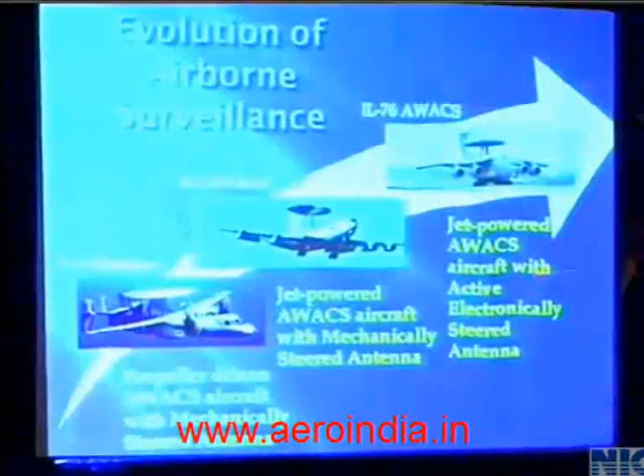The real AEW&C program, the first operationally feasible one, started with the E-2 Hawkeye, as everyone knows. That was followed by the E-3 AWACS of the Americans. Both employed a mechanically rotating antenna, primary radar, and IFF back to back. Very soon we saw the advent of the active electronically scanned array, AESA, and the Indian Air Force has already inducted the IL-76 from ELTA. The arrival of AESA radars, which basically consist of...

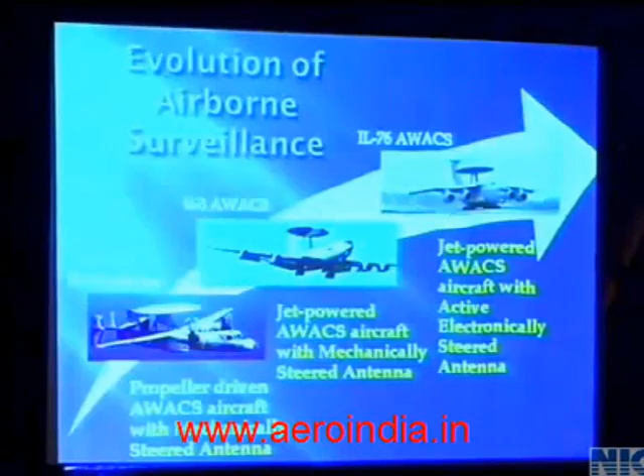each element of the array fed by its own transmitter and receiver and a common phase shifter, lends itself to a few operational as well as technical advantages. I'm sure that an august gathering like this is quite aware of the capabilities of AESA radar.

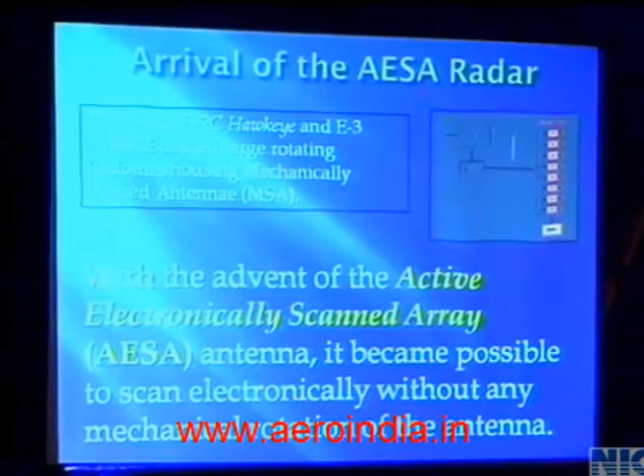It could provide graceful degradation in performance. It could give a very electronically agile beam, which permits you not only to do track-while-scan but also go in for high precision tracking, full track mode, with updates of measurements from the radar at your disposal. It has better ECCM features, so I'll not go into all those. This brought about a kind of change in the scene of AEW and AWACS the world over.

These are the currently AESA-based five systems. We'll have a quick look at each one of them.

The first one in the AEW or AWACS scene was the Swedish Erieye radar on the Saab 340. It employed two arrays in a rectangular pod-like structure on top of the aircraft. It was propeller-driven, an S-band radar giving 120 degrees on either side, that is 240 degrees total, so there was considerable blockage in the fore and aft axis of the aircraft.

The second one, the same Erieye, was adopted by the Embraer platform, and this particular system is available with Brazil, Greece, and Mexico.

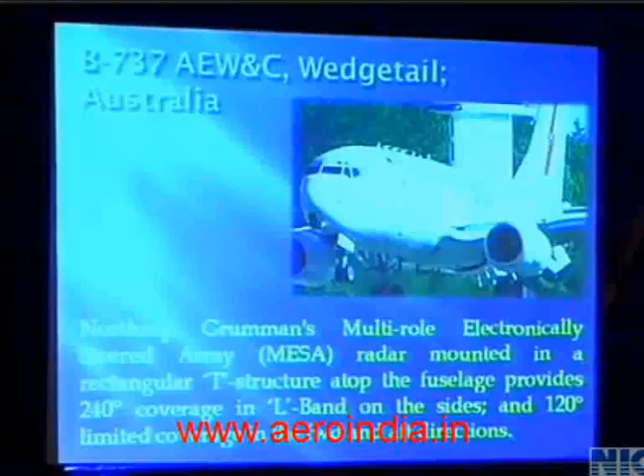The other one, Wedgetail, is Boeing's offering to the Australian Air Force and Royal Air Force. It employs the MESA radar of Northrop Grumman, with a T-structure dorsal unit on top.

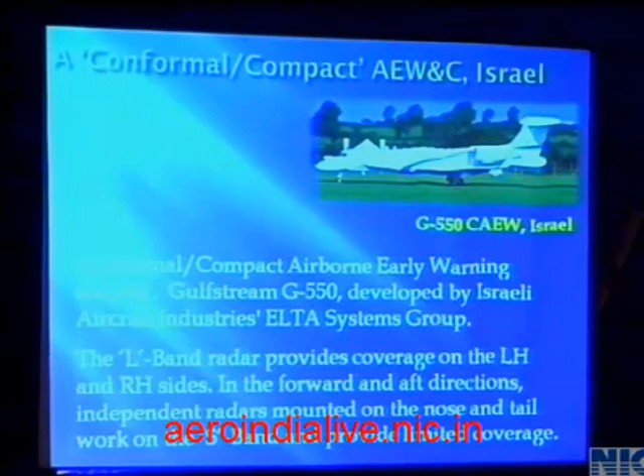The side panels in L-band provide 240-degree coverage, and the top hat provides the fore and aft coverage. Of course, ELTA is here, maybe he will talk more about it. The lack of coverage in the fore and aft axis is covered by S-band arrays in the front and back of the radar on a G550 platform, and our own Indian Air Force AWACS, which covers 360 degrees.

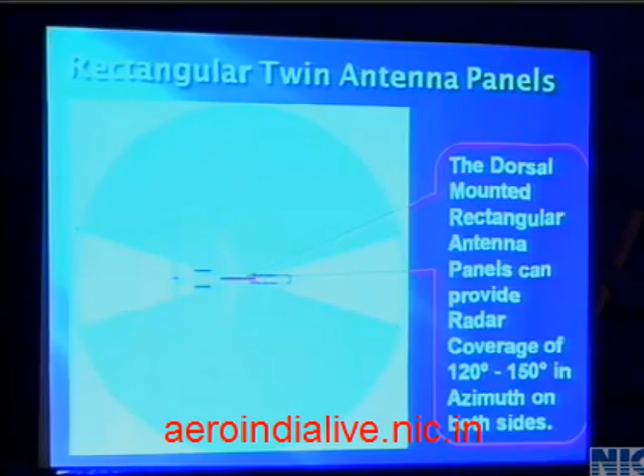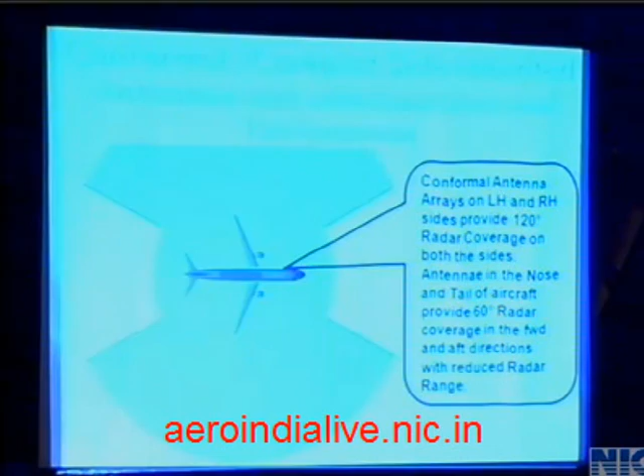Just to bring home the point to those who may not be aware, a 240-degree coverage looks like what is depicted here in blue. When you go for a limited aperture for the fore and aft, you end up with coverage less than what is on either side. The percentage could range, it's anybody's guess. However, if you use 3 panels, each covering 120 degrees, and put them in a dome, this gives you equal coverage all through the 360 degrees.

Incidentally, keeping in with the theme of this seminar, even here, India, Israel, and Russia were in collaboration and networking to produce this product. Now, with this introduction, I come down to our own system.

The operational roles that the Air Force envisaged for this system were to detect, track, and do the command and control function, and act as a complement to the bigger IL-based system.

AEW is not new to CABS. Way back in the 90s, we had mounted a mechanically rotating rotodome-based radar on top of the Avro HS748. And many of you who are old-timers would know that it came to an unfortunate end.

From there, keeping in with the trend of the world, we have also switched over to the electronically scanned AEW&C based on the Embraer 145, using a rectangular panel on top in S-band.

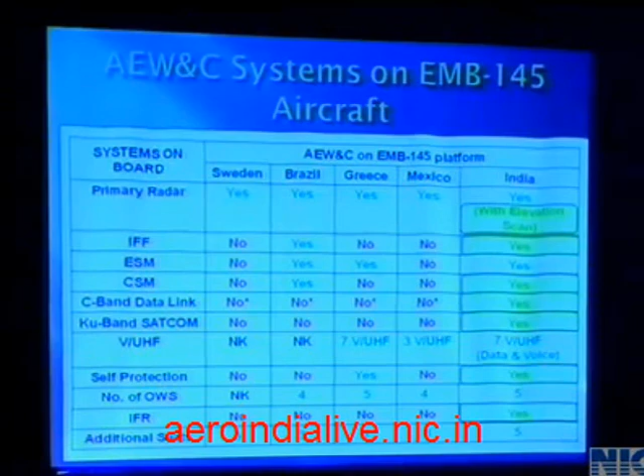So these are the major differences I would like to keep in mind, and the capabilities we intend to put in place, and so far, how far we have come in implementing this. Let's have a look at that.

Who are our partners? The Active Array Antenna Unit, AAAU, what we call the dorsal one, is designed and developed by CABS, Centre for Airborne Systems. We are the nodal agency for this program. The rest of the subsystems of the primary radar come from LRDE Bangalore, that is Electronics and Radar Development Establishment. IFF is done by CABS, and ESM is from DARE, Defense Avionics Research Establishment, Bangalore. Communication support measure comes from Defense Electronics and Research Laboratory, Hyderabad. So these form the 4 major sensors of the AEW&C system of India.

This is the mission system controller, in other words the mission computer, which is the heart and nerve center for the computing. It carries out the integration of all the sensor data, establishes system-wide tracks, carries out threat assessment, provides control and guidance, intercept vectoring and recovery, and a host of housekeeping duties.

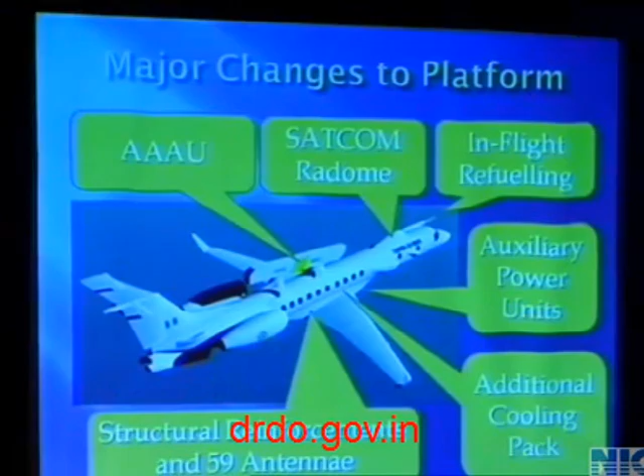Similarly, the in-flight refueling, the IF refueler, happens to be the IL-78 based one. It's a 4-engined aircraft. This aircraft needs to go behind it in its huge wake and mate successfully and get refueled. So these are the major modifications which have been done, and various working groups working on this have interacted both technically and managerially to get this going.

Similarly, a view of the cabin layout. We have the mission system racks in the front - this is the fore and this is the aft of the aircraft. These are the mission system racks, followed by 5 operator workstations, rest crew seats. Then we have some storage facility, and we have added auxiliary fuselage fuel tanks to increase the endurance of the aircraft. This calls for working in close relation with Embraer for weight and balance, CG balancing of these.

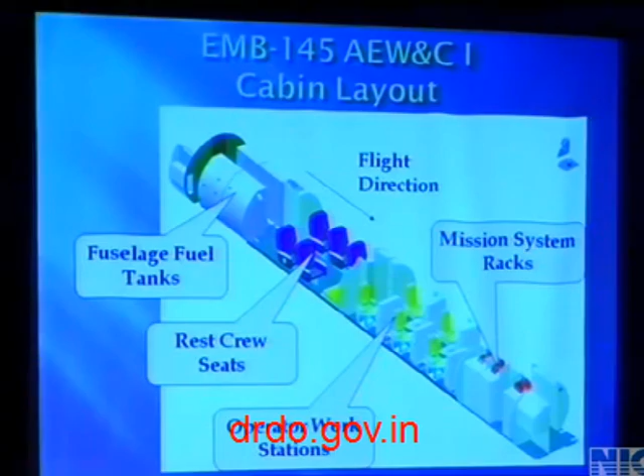Although Embraer was to certify against FAR requirements and look after the handling capabilities of this air platform, we, as the designer of AAAU, were to have inputs on the aerodynamic as well as inertial loads coming onto the dorsal unit at different alpha and beta angles.

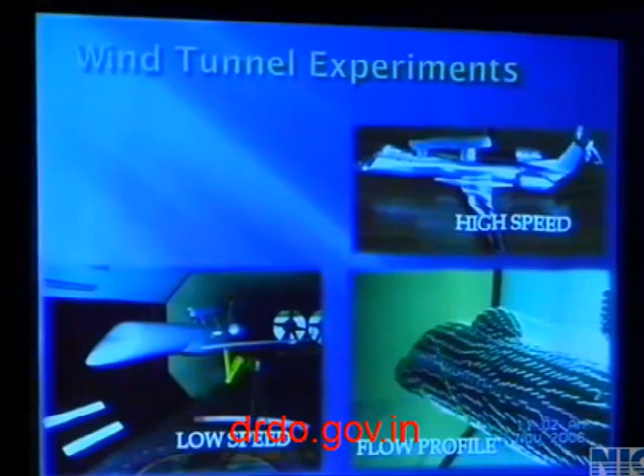So we ran our own wind tunnel campaign, both at low speed and high speed, at the Indian Institute of Science Bangalore and NAL Bangalore, including flow visualization, to arrive at the load, and that formed the basis on which we worked our structural aspects of the AAAU. So IISc as well as NAL were leveraged for the wind tunnel as well as the stress analysis, CFD studies.

You can see the airflow depiction of the TR modules, the RAM air being taken and circulated to cool the electronics within the AAAU.

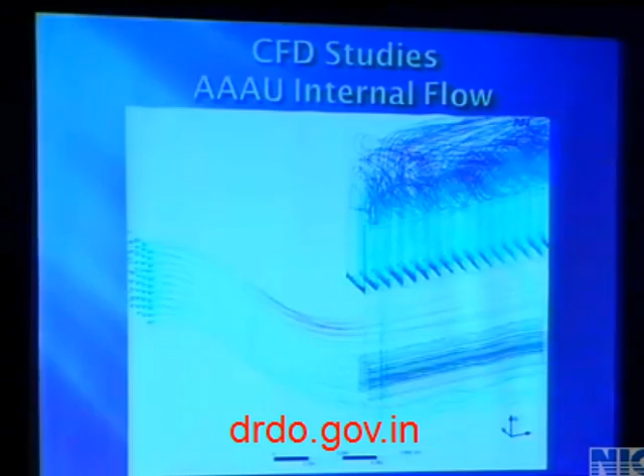Now I'm halfway through my talk, so far maintaining the timing. The prima donna of AEW happens to be the primary radar, and most of my time will be on this, because the platform aspects you have already seen.

Making of the AAAU was not a simple thing. It is multidisciplinary in nature, starting with aerodynamics, mechanical, environmental, electrical, material and fabrication, and of course the electronics. There was interaction amongst all these design groups to arrive at a viable AAAU which a 24-ton aircraft can take, while giving radar performance which matches or at least exceeds what is available contemporarily.

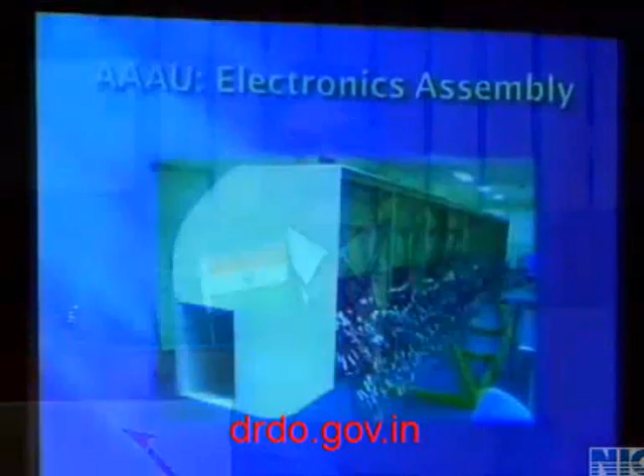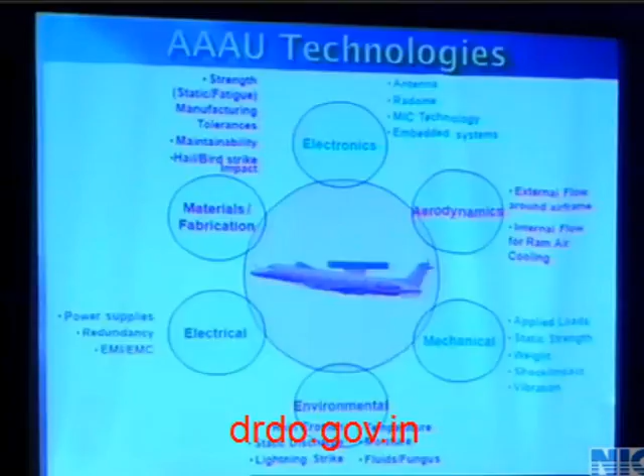Probably we can discuss this further for those interested, but that particular slide depicted the kind of networking needed at CABS to achieve success in this field. This shows the miles of RF cables being routed from the TR modules to the radiating elements.

The AAAU itself consists of, this is the front of the AAAU. There are two ducts running through the entire length of the 8.24 meter long dorsal unit. One carries the RAM air, the other takes away the hot air. The primary radar and IFF radar panels you can see here.

This is the primary radar S-band array, and this is the L-band array of the IFF. You can see the 8 elements in elevation to provide elevation scanning. It is now mounted for one of the structural tests, which I will cover soon. This is the GVT and modal analysis that was carried out.

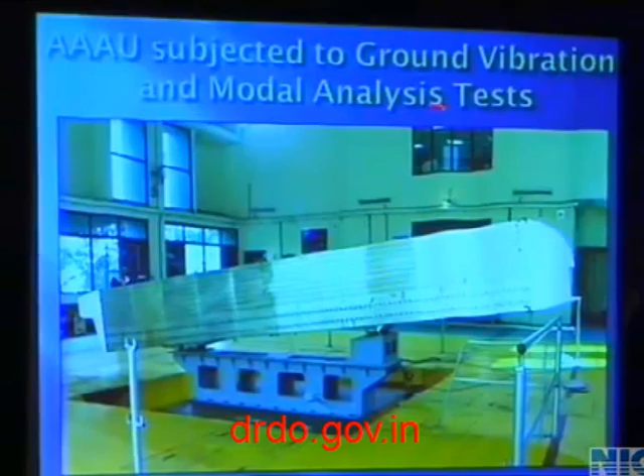And the interaction that went through the panels, the antenna panels - instead of having a regular radome, we took a different path. A material based on Teflon was fabricated and cladded onto the antenna panel to protect it against weather and other conditions.

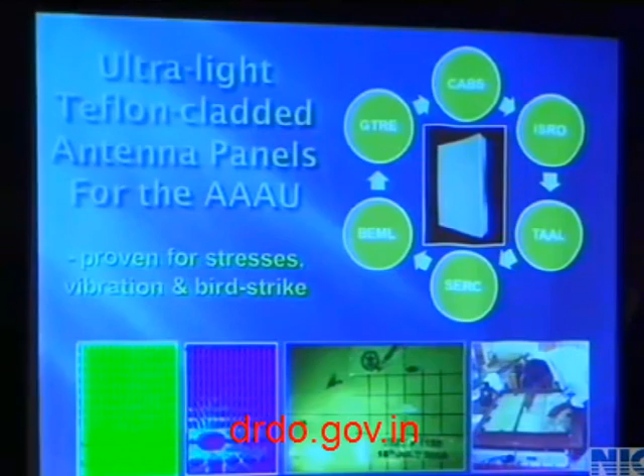This kind of structure, CABS and ISRO helped us to put this cladding. Taneja Aerospace, Structural Engineering Research Center of CSIR, Bharat Earth Movers Limited, and GTRE were in network, collaborating under the aegis of CABS to do the wind tunnel and bird impact studies.

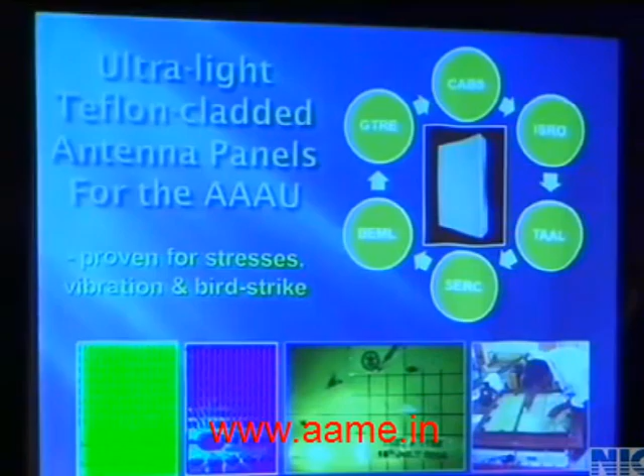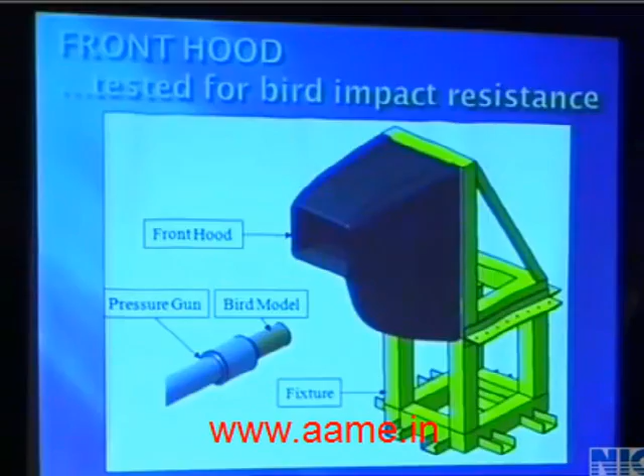You can see the bird impact studies done on the panel, and it is qualified. The same test was done on the front hood at different beta angles and the cruise velocity of the aircraft.

One of the important building blocks of any AESA happens to be the transmit-receive module, which consists basically of a low-noise high-power amplifier and a low-noise receiver. Each one of these feeds every element of the array. This is something which is prone for denial and is not easily available.

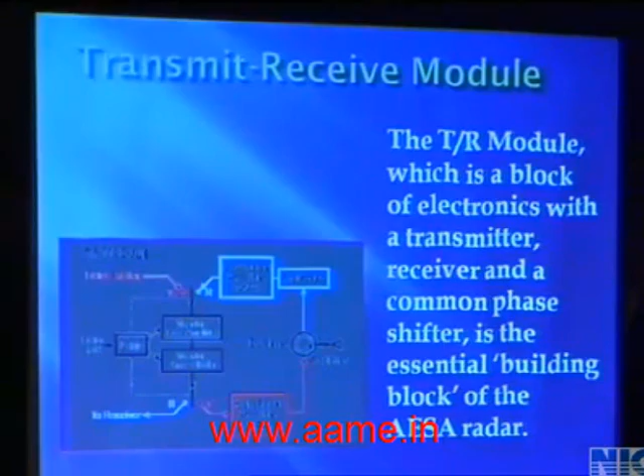And if we have to do it within India, we have to produce it, qualify it for airworthiness, and it needs to be air-cooled, with quality system and production in numbers, in hundreds, to be established. I'm glad we have been able to do this with the help of Astra Microwave at Hyderabad. This shows the inside view of the TR module.

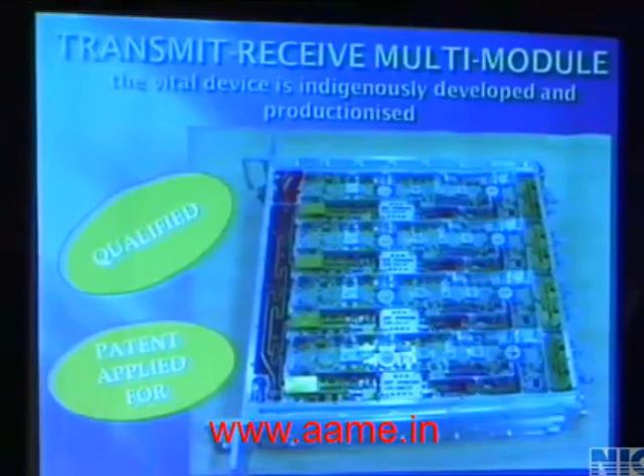The cooling of the AAAU is also depicted here. When we did this analysis, the power supply units were housed inside the bottom duct, and we had to open a bypass to cool them.

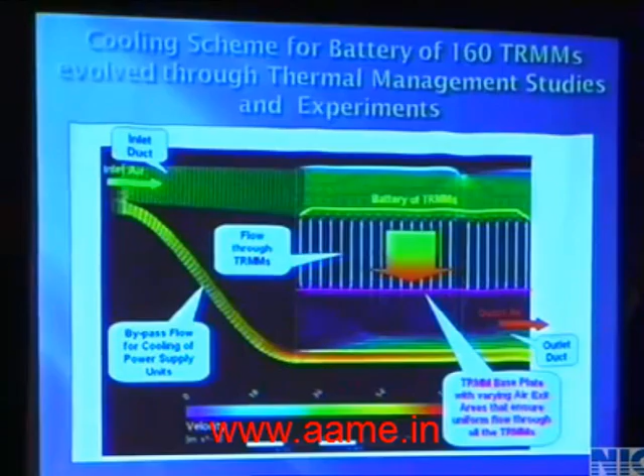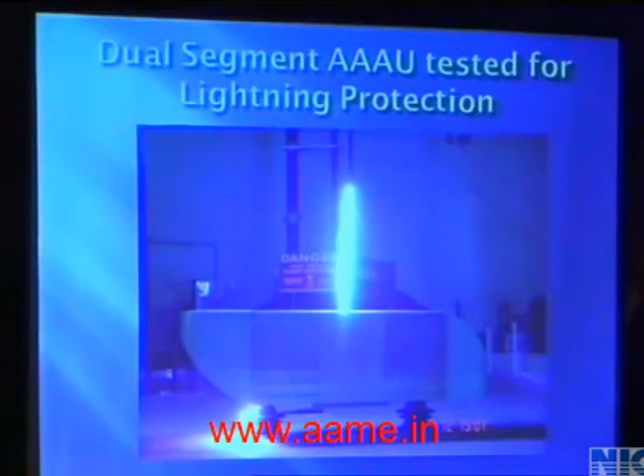And like all other major avionics systems, it had to undergo lightning tests, both for direct and indirect effects, that is high voltage and high current. You see a truncated model, 2-segment AAAU under lightning test. This facility is in CABS. Now you see the truncated version, dual segment.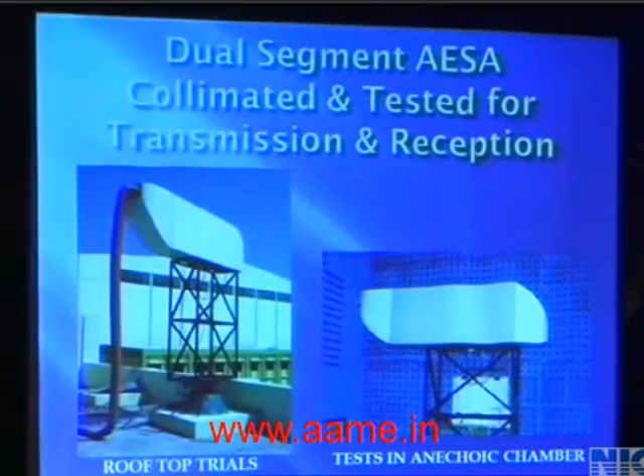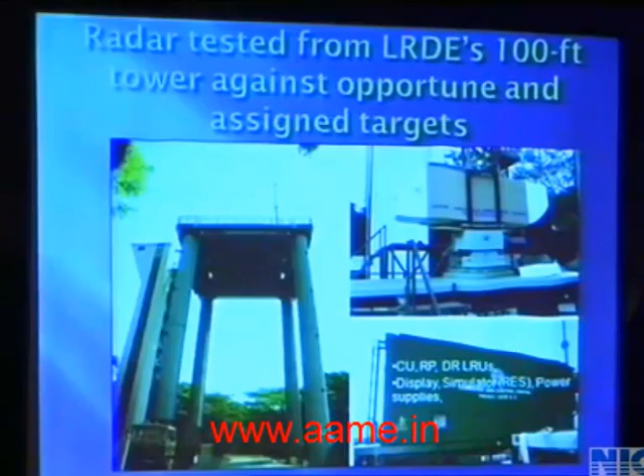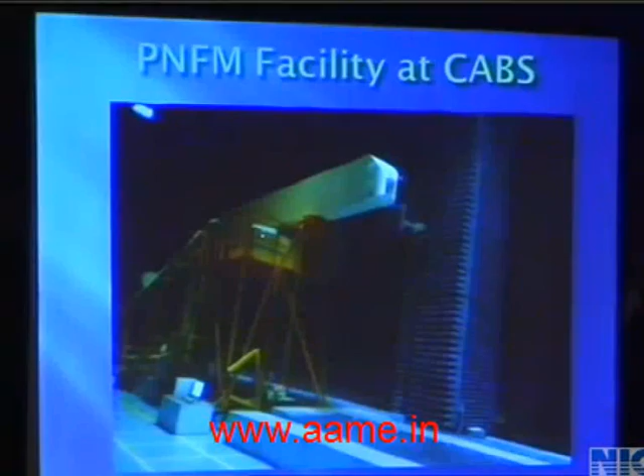AESA being mounted under an anechoic chamber, on top of the LRDE facility, that is a 100 foot tower, undergoing radiation trials. This is a full-fledged 8.24 meter long full array in the PNFM facility, the planar near field measurement facility of CABS.

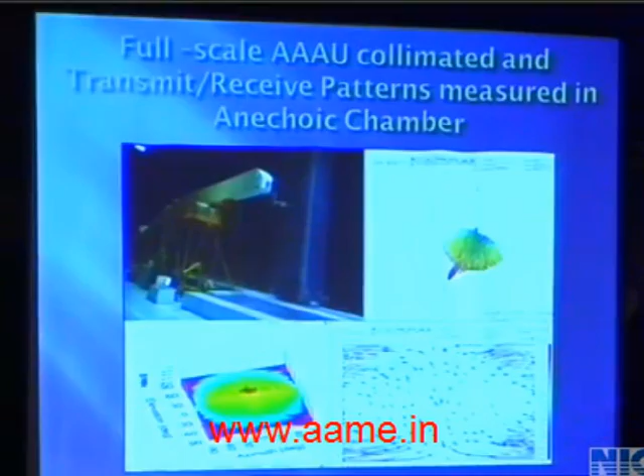The collimation and calibration of the TR module and the array is over. Some of the results of the collimation and calibration are shown here. This has been integrated and tested with opportune targets and simulated targets as well, and some of the tracking results are shown here.

Now I'm coming to the second major sensor, which happens to be IFF. This is a Mark 12 with mode 4 and mode S, level 2 interrogator, developed in-house. Of course, the high power L-band amplifier comes from elsewhere.

Since we didn't have a platform of Embraer available straight away, we utilized the Avro aircraft available in CABS as a flying test bed to test our individual systems, not in an integrated mode, but as a standalone facility. That's why a special planar array was made to implement the electronic scanning of the IFF beam.

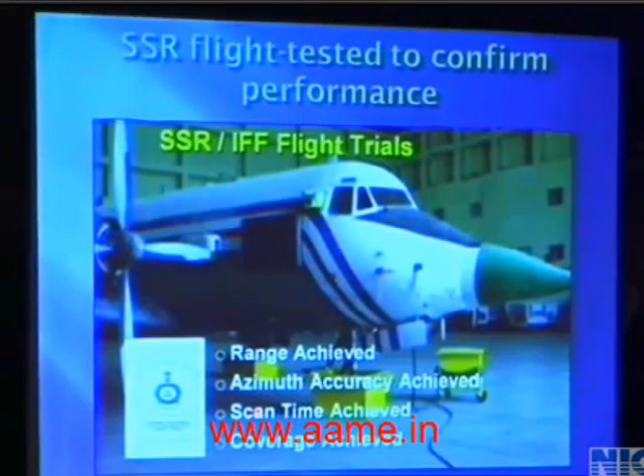It was put through rooftop trials, and it has been fitted on the Avro. You will see the antenna array here. Flight trials have been done in 2 phases, and the third phase is due now. We have been able to establish all the modes of operation - 1, 2, 3A, C - and mode 4 S is pending. What we have achieved are the range, azimuth accuracy, scan time, and coverage time. That's the test report.

The ESM system is done by DARE in Bangalore. This shows the picture under integration in the lab condition. The ESM, as I said, is capable of covering 360 degrees, and capable of giving high accuracy in frequency resolution as well as direction of arrival.

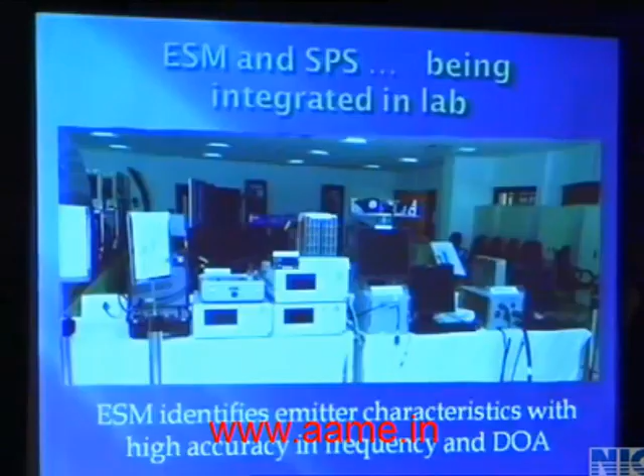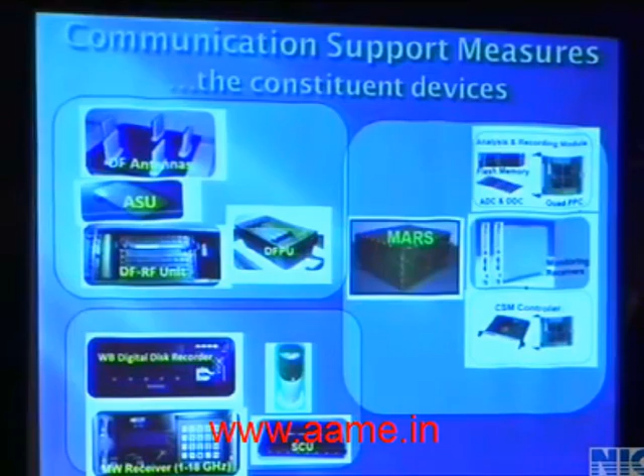This particular system is software intensive, and since the Air Force were still evolving their concepts of battle management and command and control, the Air Force team in CABS is totally involved in developing this and the algorithms - the intercept and control algorithm based on collision, pursuit, collision and offset have been developed, and they are under validation. The Air Force team with full-fledged fighter controllers evaluate these algorithms and give us a go-ahead.

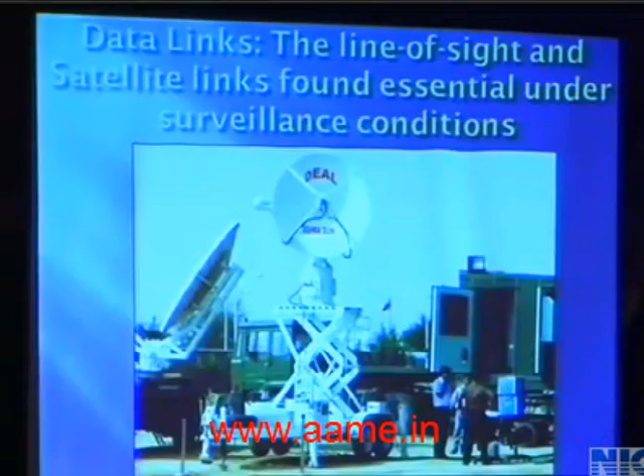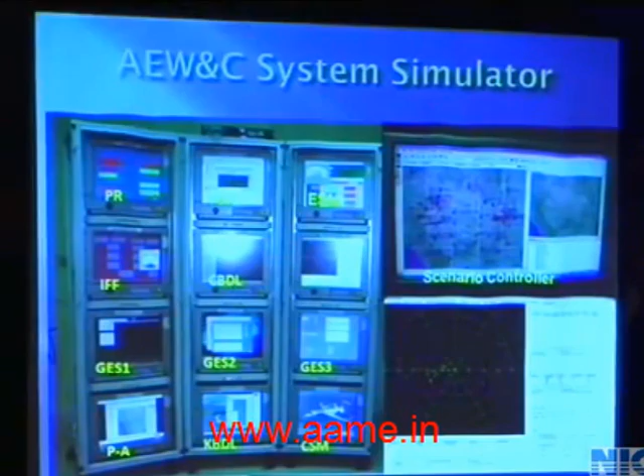We have an AEW&C system simulator also, just to verify the design, evaluate the performance, and validate the algorithms that we have used - one of the scenarios depicted. As I said, there are so many antennas on this, maybe 70 odd.

The EMI EMC issues can break or make this program, and we had no other choice other than establishing a full-fledged EMI EMC facility to ensure that the aircraft qualifies through this. And we are working very closely with CEMILAC because Embraer is responsible for structural integrity, whereas functional certification will be given by CEMILAC.

Making the AEW system alone is not sufficient. Any such system requires ground support systems. The first one happens to be the mission planning and analysis system - this is the view that has been developed in CABS. It prepares the pre-mission data for loading onto the mission computer of the AEW system. Similarly, it takes on the recorded data, and one can do analysis on the ground.

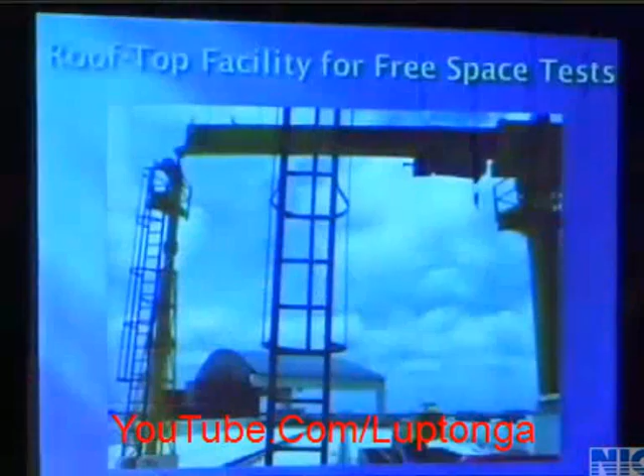Since we have to do rooftop radiation, some basic infrastructure has been created. The AEW&C system talks to the ground exploitation station - 3 of them deployed at the criteria laid down by Air Force - and it needs to provide both data link as well as VHF channels, plus 2 OWS for the ground commander to exercise his control. These are also part of the deliverables of the program.

Our old flying bird - I'm very fond of it because literally I started my career with this. We use this platform for all our standalone testing and flight evaluation, because the Embraer platform is likely to come in the later half of this year, and we don't want to lose the time, because the time schedules of this program are extremely ambitious and very tight, and we need to prove them as quickly as possible. So that is the approach we have taken.

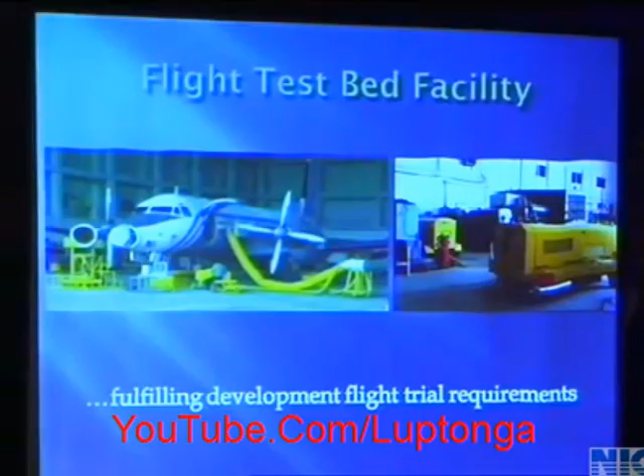What we intend carrying on with our networking: Embraer has finished the fuselage junction, pylons are available, they fit the DAU, roll out, and carry out the flight test campaign with the DAU that we are given, which is a dummy in the sense of mass equivalent and CG equivalent.

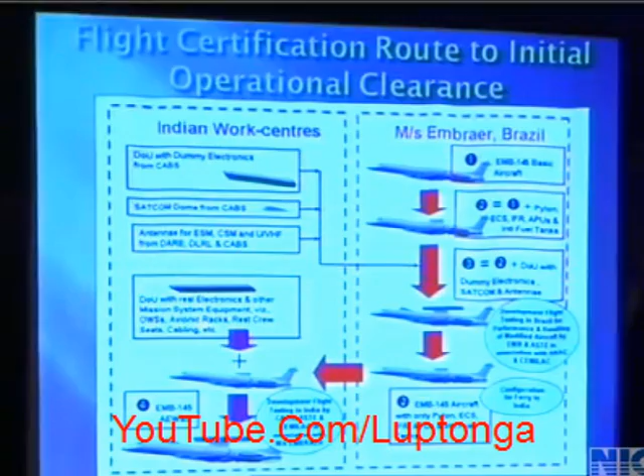In the meanwhile, our full-fledged DAU is getting ready with the electronics in it. It gets evaluated on the rooftop. We have no means of fitting it on the Aero. So once the aircraft comes to India, we need to swap the actual DAU with the dummy and carry on our flight evaluation.

So this is the networking approach that we have undertaken, and all our aspirations and proof of the pudding will be seen in 2012, when we get about 1 year plus to integrate the subsystems onto the platform, which is coming this year, later half, and we hope to go for IOC in 2012. I want to acknowledge all the help that I got from Center for Airborne Systems and DRDO, and in particular Dr. S. Christopher, the Program Director and Director of CABS. Thank you. If you have any questions.